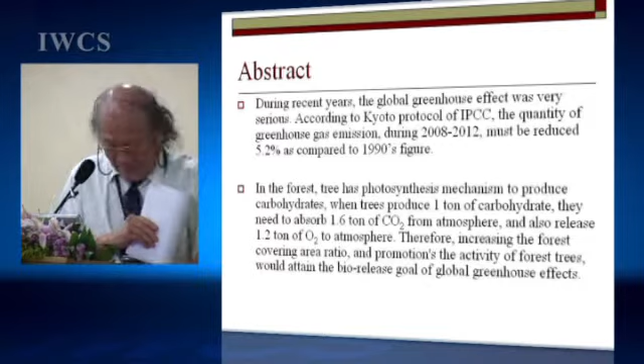And we should not go to extremes, because there is one school of thought that if people do not exist or human beings die collectively, then there won't be any ecological damage. But this is not the right solution. We should strike a balance in utilization of the natural resources and in protection of those resources. So this balanced concept is popular now. The first page is my abstract, and you may read by yourselves.

In Taiwan, it is a pity that we are living in a concrete and steel forest. It seems to be a sign of modernization. However, if you look at the quality of life, no. If you look at advanced countries in Europe, United States, North America, and Japan, we may notice more utilization of wood.

And we have done some public survey. According to the answers we've solicited from the questionnaire, we found more and more people begin to have a better preference for wood. And such preference is also quite popular in advanced countries. Concrete and steel is widely used in developing countries, threatening the health of many. So health protection and environmental protection have become more and more active today.

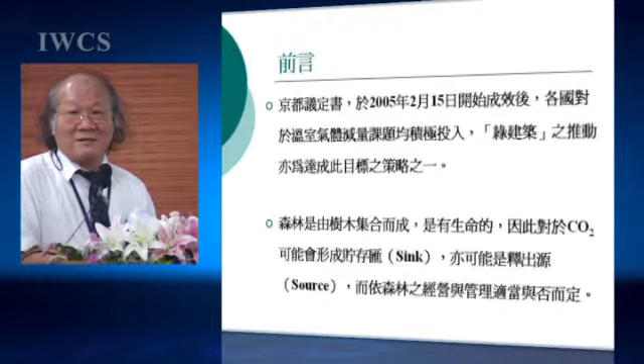In order to comply with the Kyoto Protocol, we need to do reduction in many aspects, and construction and civil engineering is a major source of carbon dioxide emission. In the morning, we also heard from previous speakers that forests can be a carbon dioxide sink. They can also be a source of carbon dioxide emission because forests are alive. So it all depends on how you manage the forests.

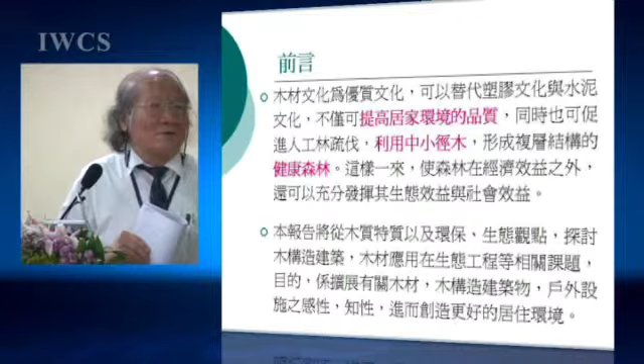Wood culture is a quality and premium culture which can substitute plastic culture and cement culture. It can not only increase the quality of household life, but will also promote the forestation efforts and make multi-structured, healthy forests. It contributes not only to economic growth but also social and environmental benefits.

And in this process, landscaping has a greater bearing on our daily life. Healthy urban life cannot be separated from a very green landscape. Over 20% of landscaping can satisfy the basic need of the citizens. If the landscaping rate is about 30%, you may find that the local citizens can feel happier. However, only a few countries in the world can still keep their landscaping rate at 30% or above.

Another contribution of the green policy is the fixation of carbon dioxide. IPCC recognized that per 1 cubic meter of forest, the carbon dioxide fixation is around 0.95 tons.

So in Taiwan, there's research showing that a big tree can fix about 808 kilograms of carbon dioxide within one square meter. The bushes can only fix 217 kilograms. The flowers can fix 46 kilograms.

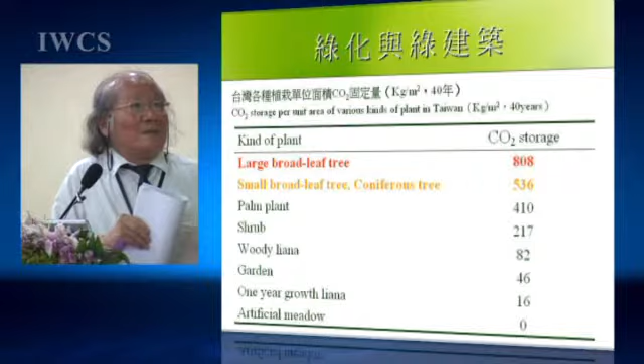So when we are designing buildings, we need to consider for 1 square meter how much carbon dioxide we need to fix. We need to consider this when we rate whether a building is green or not.

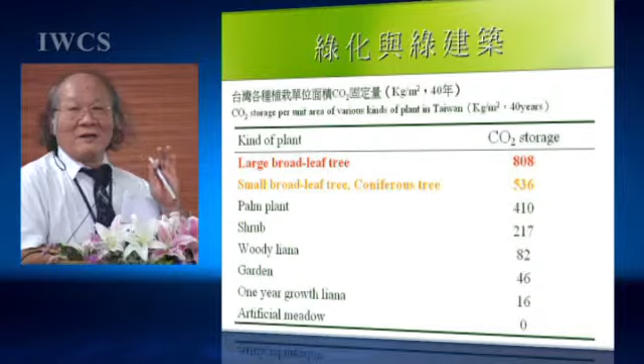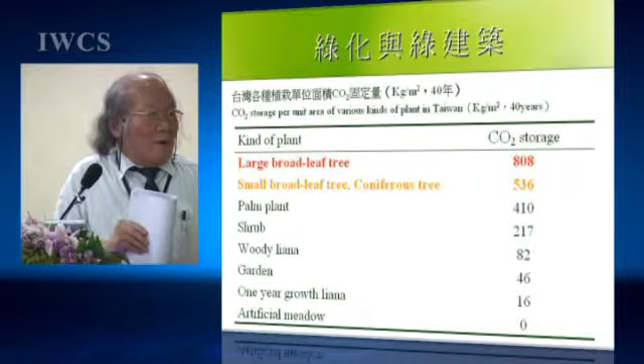For public buildings, if the cost of building is over 50 million, then you need to have the label. You need to meet the 9 indexes to get the label of a green building. If you cannot get a green label, you cannot build the public building. This is showing that different plants can fix different amounts of carbon dioxide.

Why we need a large broadleaf tree in every square meter: we hope that Taiwan can pay more attention to greenization. 600 must be exceeded for the carbon dioxide fixation. Otherwise, points will be deducted, and they will not be able to get a green building label.

Another thing is the thermal effect nowadays. If you have green plants surrounding the house, the temperature may be lowered by 3 to 5 centigrade. And we also have a test showing that if you have flowers in the room, the temperature can be lowered by 3 to 5 centigrade.

Why do we need to do that in Taiwan? Because in Taiwan, each kilogram of cement will produce 0.4 kilograms of carbon dioxide. So do the steel, the tiles and the bricks. So in Taiwan, the carbon dioxide discharge of buildings is about 300 kilograms per square meter. So every household will discharge 34,000 kilograms of carbon dioxide. That equals what a broadleaf tree can absorb in 40 years.

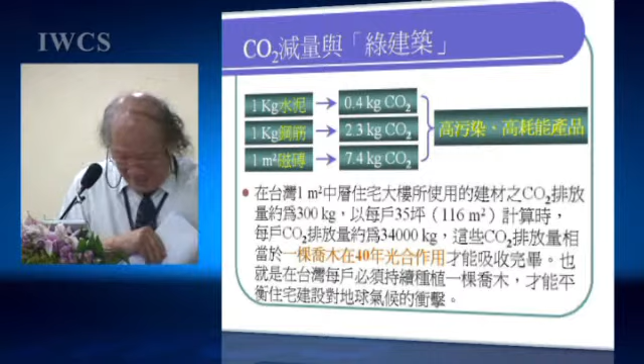So it is very unsustainable for carbon recycling. That's why we need more green buildings, so we can lower the concentration of carbon dioxide in the atmosphere. In daily energy consumption, building consumption accounted for 27.22%, about 1/3 of Taiwan's. Building materials accounted for about 10%. So carbon dioxide reduction regarding buildings is something that we must do.

Okay, let's move on to the next slide. In the morning, the Japanese friend also talked about this. When we are processing wood, the energy we need is very low. And in wood, 50% is carbon.

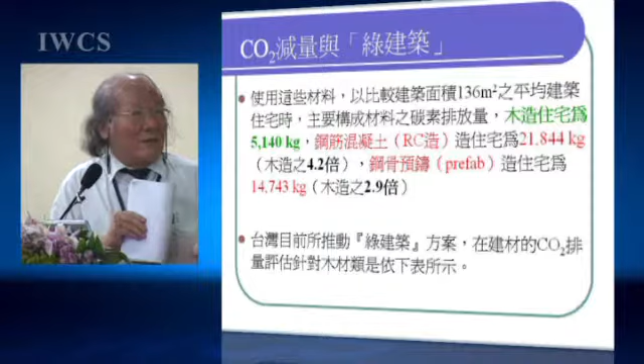In this table, you can see that in Taiwan's green building system, we need to assess carbon dioxide emission. Of course, the deduction of the figure is something positive for them. For example, for tropical forests, we encourage people to use wood from the subtropical and cold areas, and the use of wood from tropical areas is discouraged.

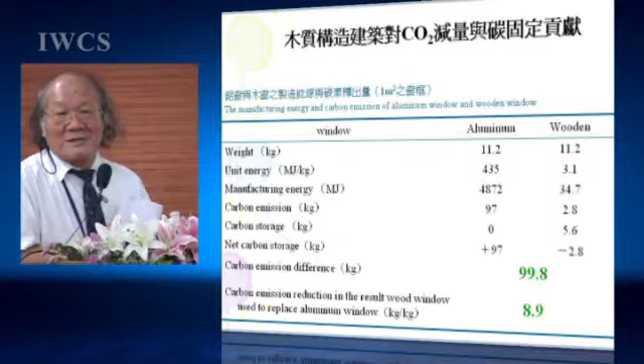The Japanese friend talked about some data from Japan. It says each household will use 0.17. Now we look at Taiwan. These are the substitutes. If you use wood to substitute other materials, this behavior can reduce the discharge of carbon dioxide. If you change the aluminum window frame back to a wooden frame, then a lot of carbon dioxide discharge will be reduced.

Okay, let's look at this slide. That's the wood structure, the life cycle of the wood, and the processing. The energy needed for processing the wood is very low, and the wood can fix half of the carbon, so it can store the carbon inside the building. It's just like an urban forest. This forest will not absorb, but it will fix the carbon dioxide.

So the wood structure is the most suitable form for the green building label in Taiwan. In order to achieve the objective of green building, we hope that we can promote the wood structure so as to attain this goal.

Now in Taiwan, we are promoting some Japanese style of building material, building structures. This is the current construction forms we are encouraging. Actually, there are three forms. One from North America, and from Japan is D-Log.

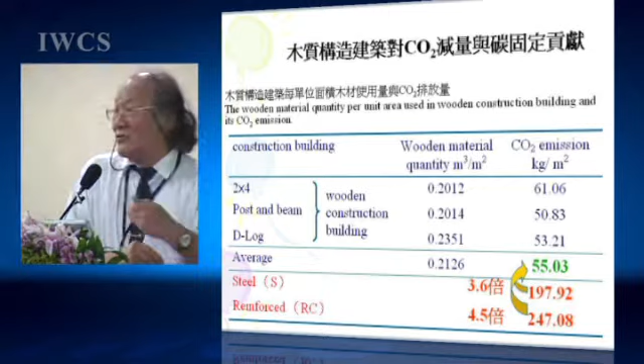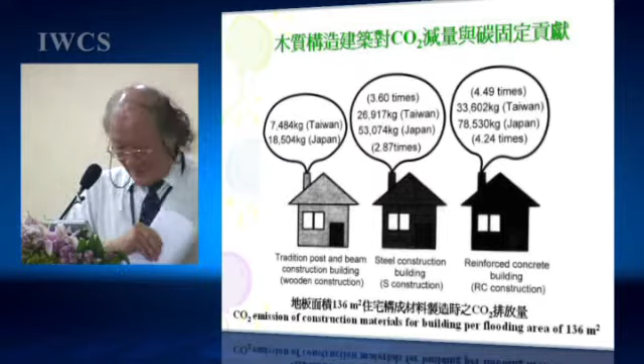In Japan, this is the figures in Taiwan, and this is the figures in Japan, because the energy structure is different in different countries. So the figures about the reduction is not the same. That is very normal. And another reason why there's a difference, because we have different ways of calculating the reduction of carbon dioxide emission.

Now, how do we judge the carbon storage? There's a very simple formula we can use to calculate. For example, how much wood are you using, or what is the density, dry density. And then you can calculate how much carbon storage you are going to get.

A few days ago, we had a forum in Taiwan. We invited Japanese producers. They told us that in Okinawa, the wood structures, they use 1 cubic meter of wood, and then there will be an increase of wood consumption. And then some people worry about where can we get the trees and where can we get the lumber. I think that is a problem of sustainable utilization of the wood.

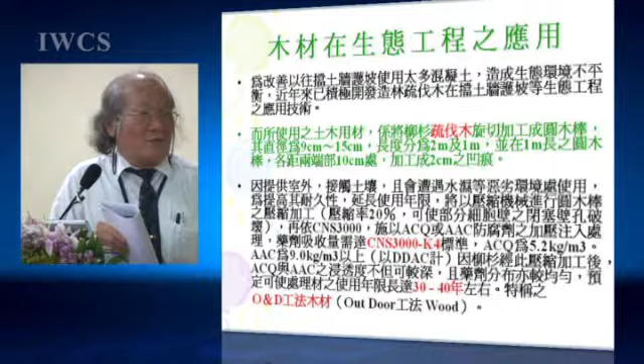we can use a lot of other ways, like compression, like the O&D method to help the material resist water corrosion. And we also use some ACQ. CCA has been banned in Japan from this April. And then we estimate that the material can last for 30 to 40 years without any sign of corrosion. That is what we call the O&D method.

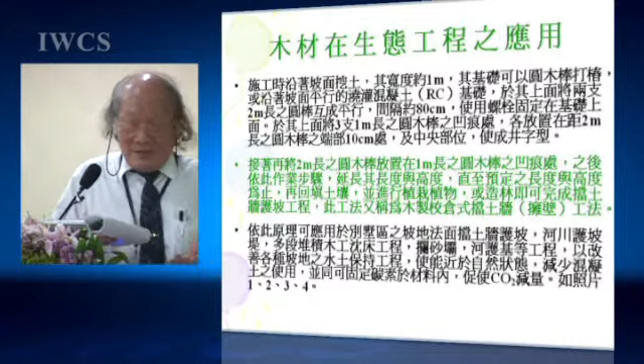And then we place the structure on this 2-meter wood. And then we place the 2-meter log on the carving of the 1-meter-long log. That's what the Japanese have done many years ago, and it can be used as the wall or the dam to fight the flood.

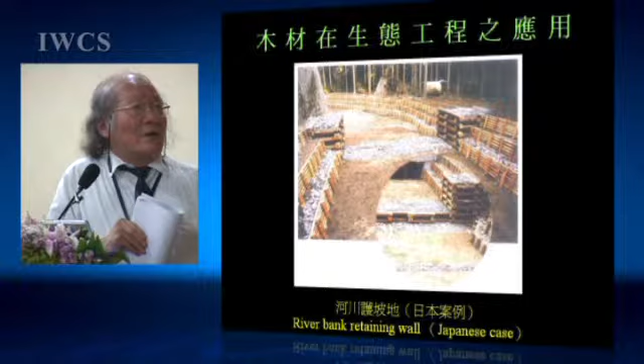You can see this is what the Japanese have done. This example, the wooden frame retaining wall of Japan. This is a multiple assembled wood crib wall, and this is not a complicated project. It's a river bank retaining wall. Okay, I now give some introduction to some Taiwan projects.

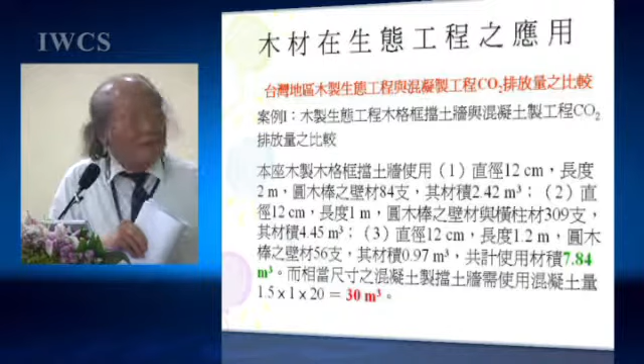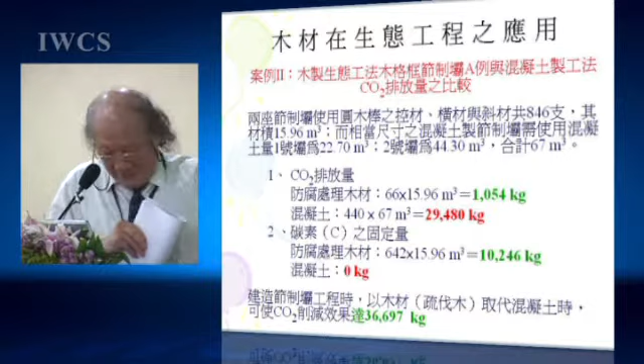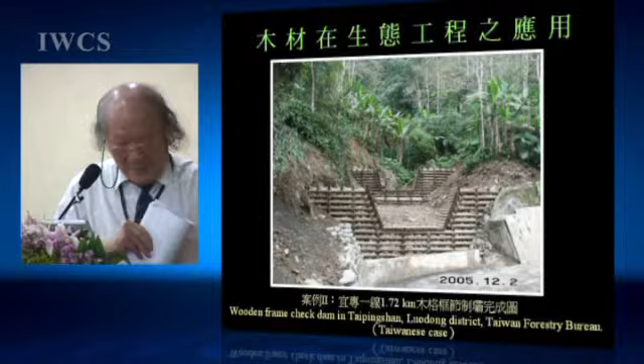Another case was done in 2005, and now if you go to the place, it's all green. This is another one, designed especially for the purpose and convenience of comparison. So those three are typical cases, done in the same basin area, and we want to study the development after several years.

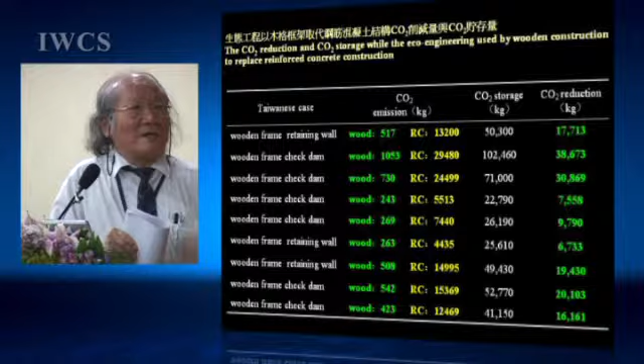If we combine the cases, including the wooden frame retaining wall and wooden frame check dam, in the processing of the wood there will be carbon dioxide emission. The green represents the wood consumption, but compared with steel and concrete structures, the emission is much smaller, and the carbon dioxide storage is 0.

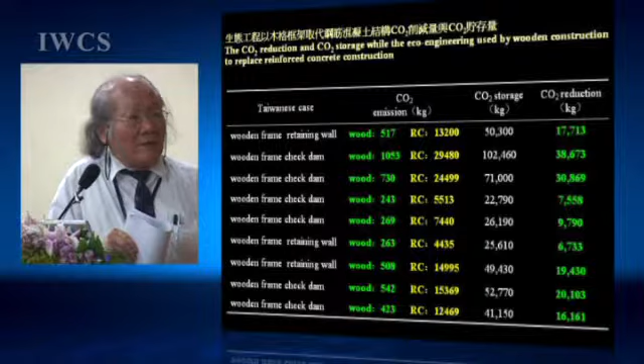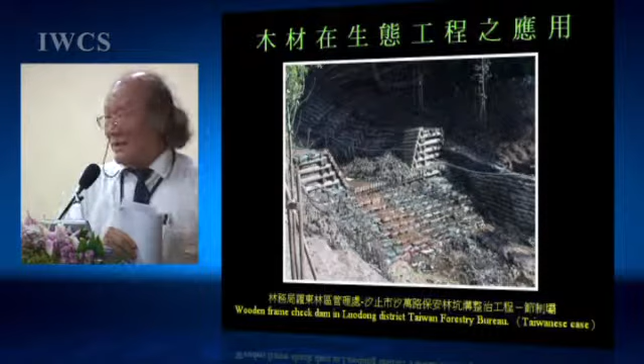So when the tool does the calculation, on the rightmost column you will find the carbon dioxide reduction. We find the top one is the utilization of wooden frame check dam, with a carbon dioxide reduction of around 38,673 kilograms. So we use this kind of calculation to lobby the general public and convince them of the benefits of bio projects, showing them the actual benefits.

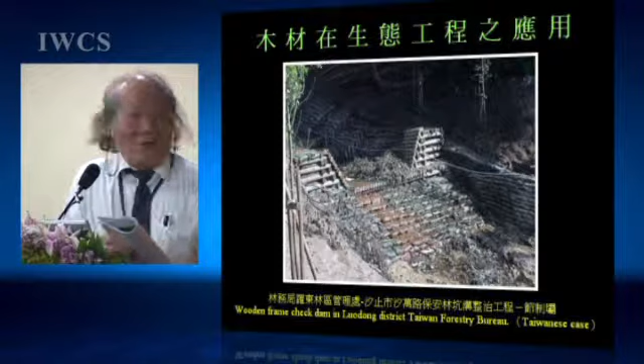Of course, there might be questions like, what about the safety? Our approach is to do this partially—it's not a whole structure using wood. In certain circumstances we use stone and concrete to function as the bearing wall, and if the topography rules out any possibility of sliding, then wood will be a good alternative.

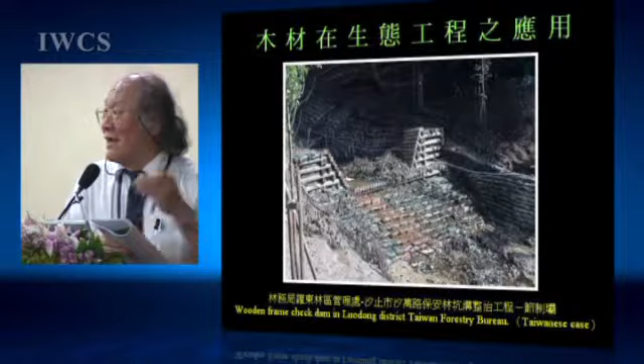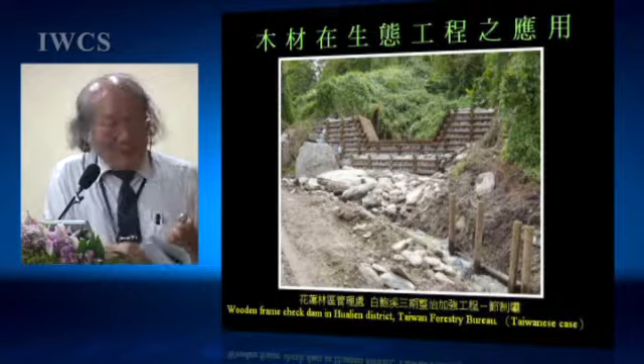For example, for one frame check dam we built, after half a year there was a flood, and we learned a lesson from that. But the structure we built withstood the test of the flood because we used a combined structure of both wood and stone when necessary. This is another wooden frame check dam, located around Taiping Mountain in Taiwan.

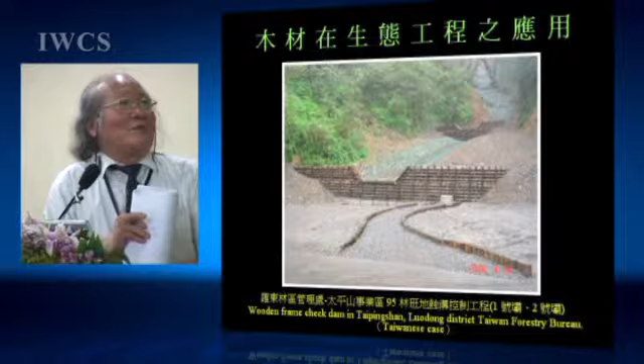A simple conclusion: whether in structures, bridge construction, or residential areas, the utilization of wood can not only reduce carbon dioxide but also make structures more safe and convenient. For one typical building, the use of wood can reduce carbon dioxide by 50 tons. So the promotion of wood culture will help people understand the benefits brought about by the utilization of wood, and we can better manage forests, realize renewable resources, and reduce the impact of global warming.